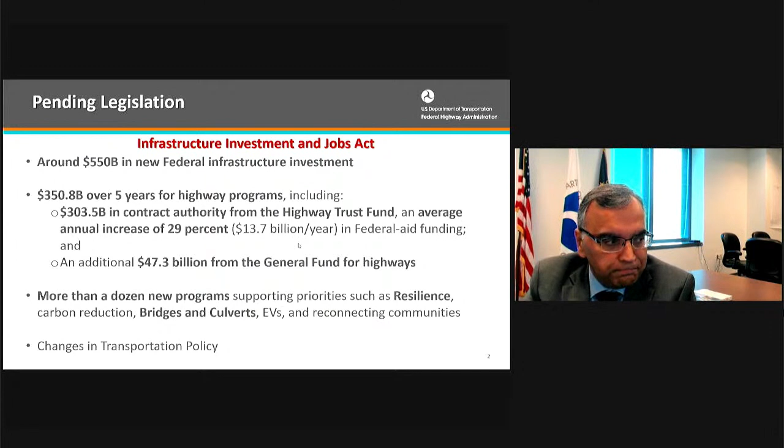Now, to Scour. Let's talk about Scour a little bit, but let me start with the history of the Scour program. Believe it or not, the consideration of Scour, along with associated attempts to apply science and engineering into bridge design, has existed for about 150 years. Obviously, the knowledge and understanding of Scour is now significantly more than at that time.

One of the important figures in Scour investigation, Dr. Everett Richardson, wrote an excellent paper on the history of Scour research and programmatic effort. Dr. Richardson noted that bridge Scour research prior to 1949 was not systematic, and much of it was single-purpose research or reports of Scour problems experienced at particular bridges. 1949 represents the beginning of the effort of Dr. Emmett Laursen from the Iowa Institute of Hydraulics Research. He began such systematic research within the United States. That's also about the same time when the US Bureau of Public Roads, the precursor of Federal Highways, started funding and supporting Scour research.

Furthermore, in 1962, the failure of the I-29 bridge over the Big Sioux River in South Dakota taught us two things. One is that Scour could adversely affect even new major structures. Second, discharge alone is not a predictor of how Scour forms at these highway structures.

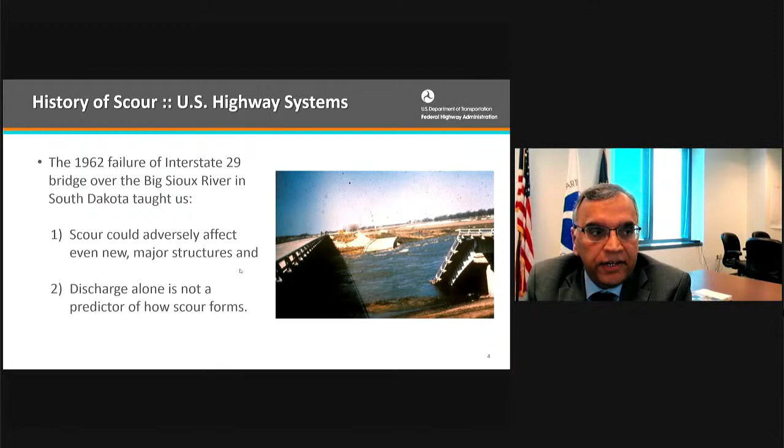Next, we move to 1973. The Federal Highway published a report in 1973 to define bridge failure and later provide data on bridge failure from the hydraulics-related component. Clearly, Federal Highway and the transportation community recognized the need for Scour research. However, various factors played a major role in not consistently applying research insight to the bridges. The key factor, simply put, is that Federal Highway lacked authority to consider Scour at bridges in anything more than a research context.

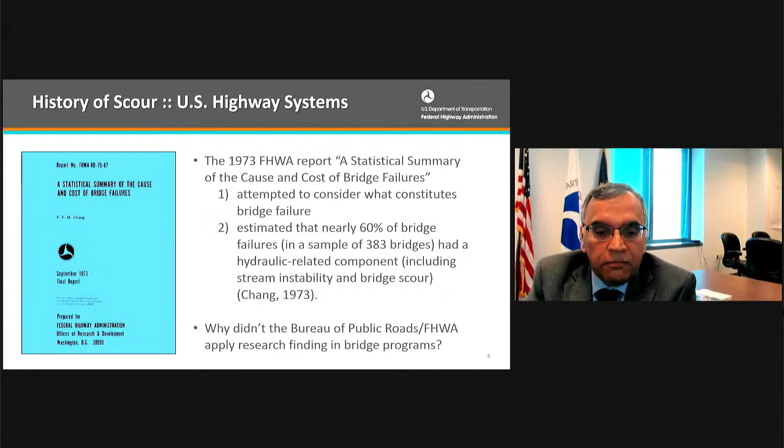Furthermore, in 1968, we started to get our statutory framework with the passage of the Federal Aid Highway Act, signed by President Johnson. That led to 1971, when we promulgated a regulatory requirement within our 23 Code of Federal Regulation to add national bridge inspection standards. However, NBIS at that time did not include or consider Scour.

And actually, on April 5th, 1987, the Scour-induced collapse of the New York I-90 bridge resulted in 10 fatalities and disrupted a major interstate route. That incident was a major impetus for establishing the Federal Highways Scour program. During the NTSB's investigation, they summarized in their report that contributing to the accident was inadequate oversight by the Federal Highway Administration. Subsequently, Scour-related bridge failures reinforced the need for Federal Highways oversight of Scour.

Based on that particular bridge failure, Federal Highway initiated a response directing that each state should evaluate the risk of its bridges being subject to similar damage during a flood in order of 100 to 500 year return period or more.

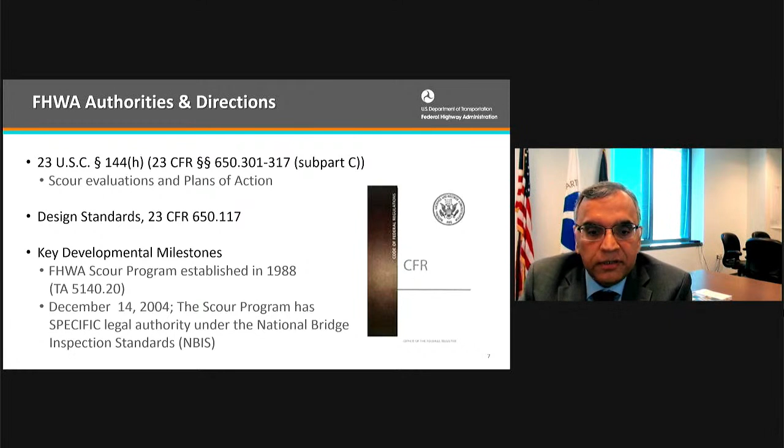So let me take a few minutes to talk about where we're going. Recognizing opportunities to improve the Federal Highway Scour program, the agency has adopted a common vision and implementation of a forward-thinking next generation Scour program called Next Scour.

The Next Scour program is an initiative with the goal to improve the design and analysis of scour that affects bridges, culverts, and embankments, with the primary goal of this initiative, obviously, being bridge scour.

Within the Next Scour initiative, Federal Highway seeks to strike a balance of continuing support of our current Scour publications, while also recognizing the need to advance the state of practice for Scour analysis through research to determine the worst case Scour depth.

So who is our target audience? The design engineers of all disciplines, whether they are generalists, hydraulics, geotech, structures, or operations. So obviously all the design engineers, construction workers, the operation and maintenance staff all have an interest in a safe bridge program. While the program is applicable to the larger group of engineers, the focus will be providing support specifically to hydraulics, geotech, and structural engineers in charge of Scour analysis.

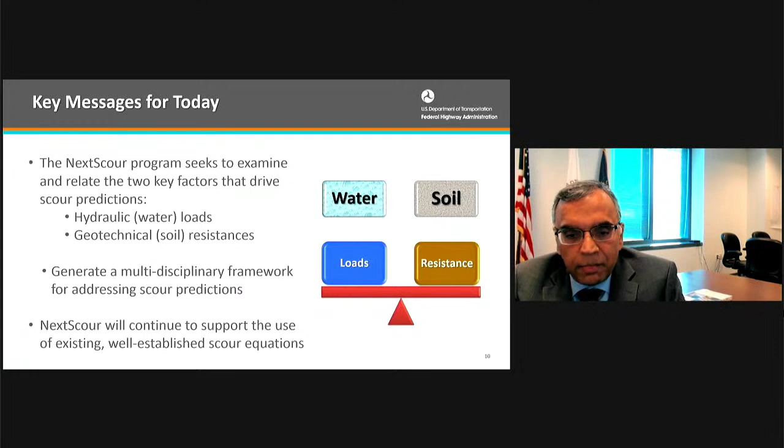Next we will seek the input of hydraulics, geotech, and structural community, both from practitioners and the academic community, federal agencies, and others for the development of program improvements. We intend to ensure transparency of development, but also ensure the final products meet the programmatic requirements.

As well as providing functional products, Federal Highway expects the appropriate application of Next Scour program concepts and tools will result in cost-effective and safe bridge design or water crossings, through improved usage of existing tools and the development of improved accuracy tools that will continue to ensure safe bridges on our highways.

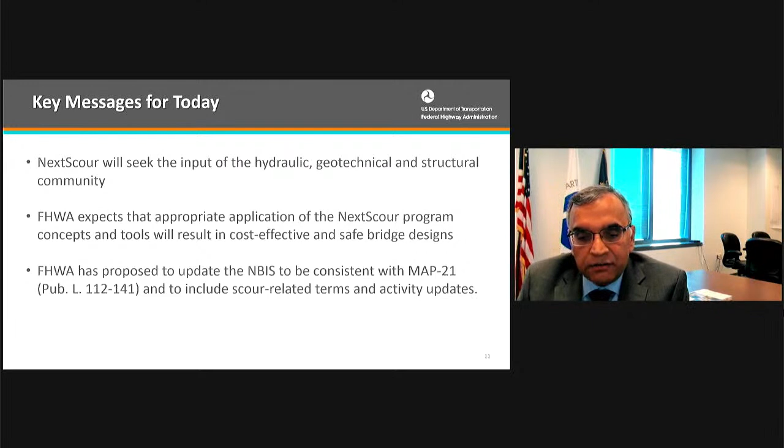Federal Highway has proposed to update the NBIS to be consistent with the MAP 21 requirements and to update the scour-related terms and activity updates.

Now, you all know that I don't have to tell you that water and hydraulics is among the most common reasons for damage and failure of highway bridges in the United States. Within these water-related occurrences, scour continues to be a significant contributor to bridge failure.

Federal Highway has provided owners with a series of scour-related publications to assist in the design of bridges that, if properly designed and constructed, would not be vulnerable to scour.

Using actionable and applicable results of scour-related research and common practices, Federal Highway aims to routinely update these manuals to provide owners with recommendations to address stream instability and potential scour.

In coordination with the NHI, National Highway Institute, we are currently updating HEC 18, 20, and 23 and their associated training courses based on the advancements we have learned since their last update. Virtual delivery platforms are now available for many NHI hydraulic courses.

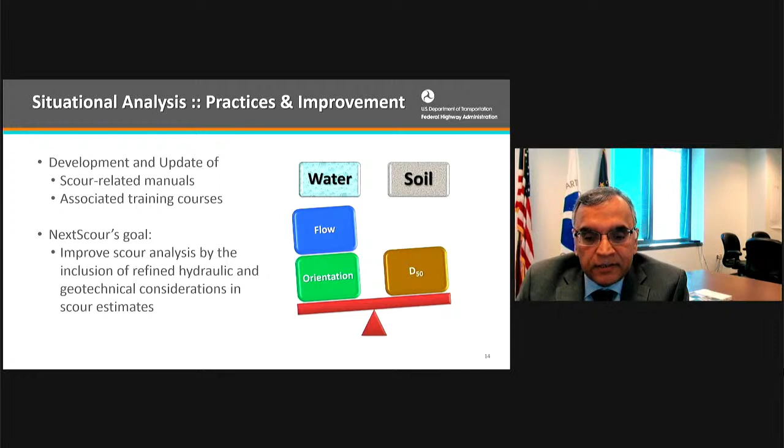I won't read both of these bullets, but you can see there are many facets being considered in the hydraulic loading aspect, as well as the soil resistance side of the equation.

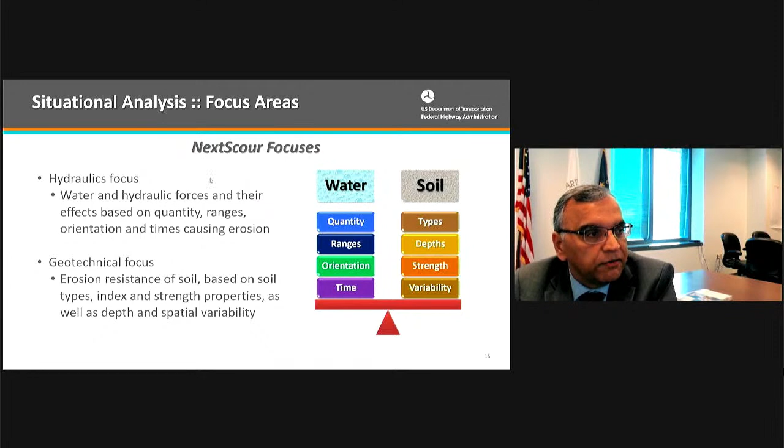I want to discuss some potential improvements of scour analysis. The Federal Highway NextScour vision is to continually improve the Scour program for each facet of the program, from hydrology to hydraulics to scour prediction.

As an example, the current state of practice for hydrology is where hydraulics engineers use the peak flow, or the rate of flow versus time, in designing hydraulic structures. Typical hydraulic practice estimates the peak discharge or hydrograph from historic stream gauge flow data, or for ungauged streams, deterministic methods.

There are other methods available. However, Next Scour recognizes the worst case scour in cohesive soils may not fully develop during one peak flow event, but rather is a result of multiple flow events.

To illustrate, perhaps we should be looking at how to represent a series of flow events over some service life that creates the maximum theoretical scour prediction.

How could we do so where no gauging station information readily exists? Are there means to describe some flow duration threshold so that hydraulic models can more readily consider the forces and effects of such situations on the stream, bridges, or embankment?

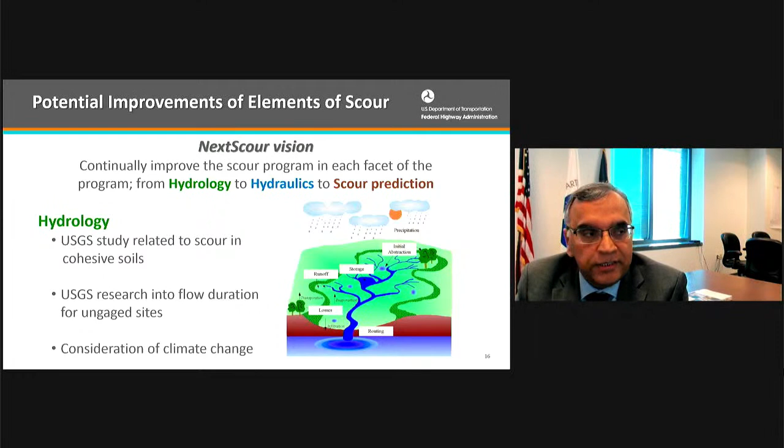Federal Highway is seeing an increased interest by owners to improve their hydraulic modeling by using 2D models instead of 1D models. This is an advancement in modeling due to a better representation of hydraulic site conditions.

Many bridge owners and their engineers are applying improved survey data found in LiDAR data, which further improves the scour analysis parameters that are provided by these more advanced models.

In addition to potential improvements to the hydrologic and hydraulic analysis parameters, Federal Highway continues to advance the state of practice for scour depth analysis by researching the geotechnical contributions the soil provides by resisting scour effect of water loads. Within the Federal Highway Research Program, there are currently 3 promising research initiatives: first, scour decay function; second, 3D scour modeling; and third, reliability-based scour design concept.

Let me very briefly touch on all those 3 initiatives. For the first initiative, the scour decay function: the current 5th edition of HEC-18 provides a discussion on rock scour for bridge piers using the stream power decay method. Federal Highway is developing a similar concept for scour in cohesive soils. The new idea will include water load decay functions for contraction, abutment, and pier scour.

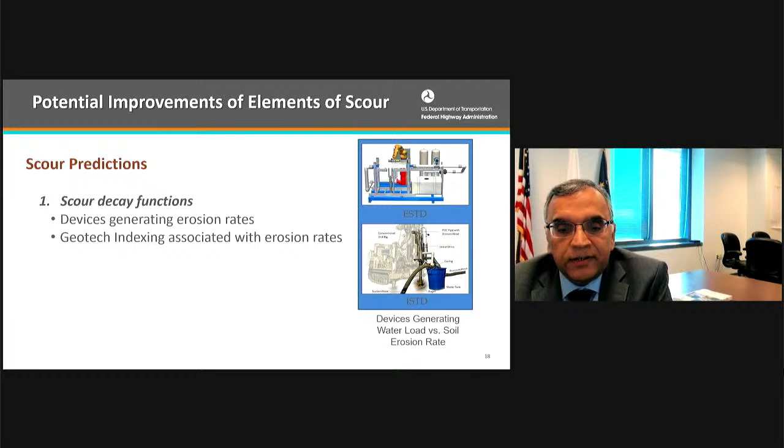We are considering this an attempt to associate erosion rates to commonly obtained geotech data at most projects and possibly avoid the need to perform costly erosion rate testing of each project.

Second research initiative is about the 3D scour modeling. We see potential improvement in determining each component of total scour using 3D scour models. Whether the development is performed through the Federal Highway Research Lab or its contractor or through another entity, there are many hurdles to overcome with this approach, and it will take much coordination by members of the hydraulic and geotech communities.

Some general steps for this research initiative include: build bridge hydraulic related software and applications capable of modeling sediment transport; model simple and complex bridge components; build a GUI to enter data for these conditions. Fourth step is develop the geotech stratigraphy and their erosion rates within the software environment. And the fifth and final step is perform many additional soil erosion tests to build a database of varying soil parameters.

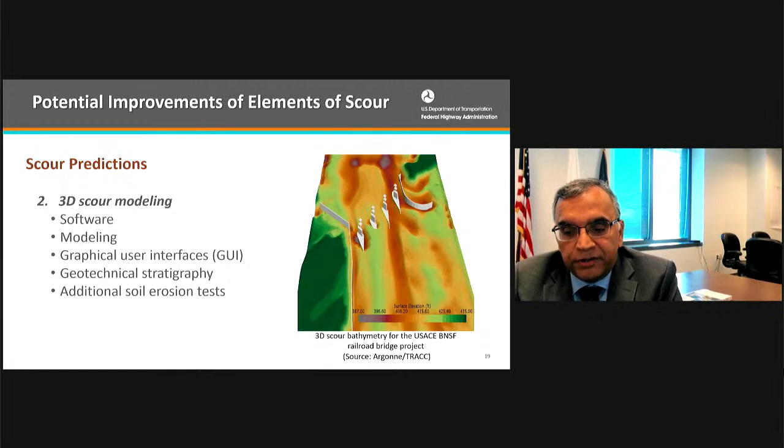Now for the third research initiative, the reliability-based scour design concept. The purpose is to identify and evaluate the uncertainty associated with bridge scour prediction, including hydraulics and model equation uncertainties. Reliability-based scour design concepts are being researched. This reliability-based design concept provides a powerful tool in quantifying the safety level of bridges and producing strong support for decision-making in bridge construction and maintenance.

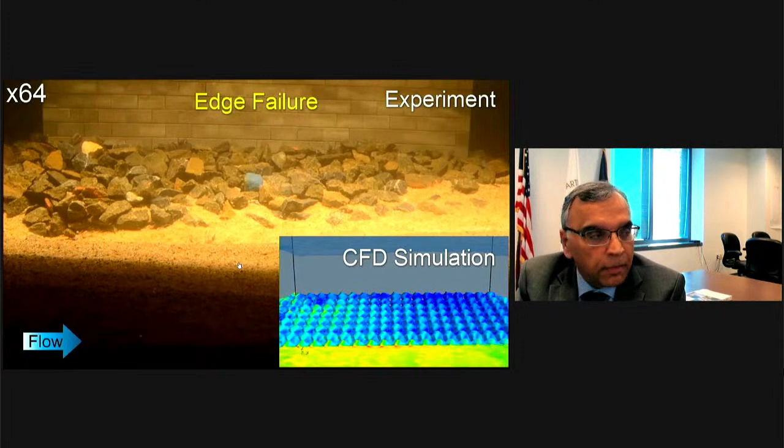Another research initiative underway is to determine riprap countermeasures reliability. Shear failure and edge failure are two modes of failure for existing installations that Federal Highway is evaluating. There's supposed to be a video on the screen, but unfortunately the video is not working, but that depicts our research on the edge failure.

The next scour program seeks to fill these gaps in the current scour program by performing collaborative research to integrate geotech and hydraulic engineering and provide improved and engaging training that will help engineers effectively use the existing and future scour tools.

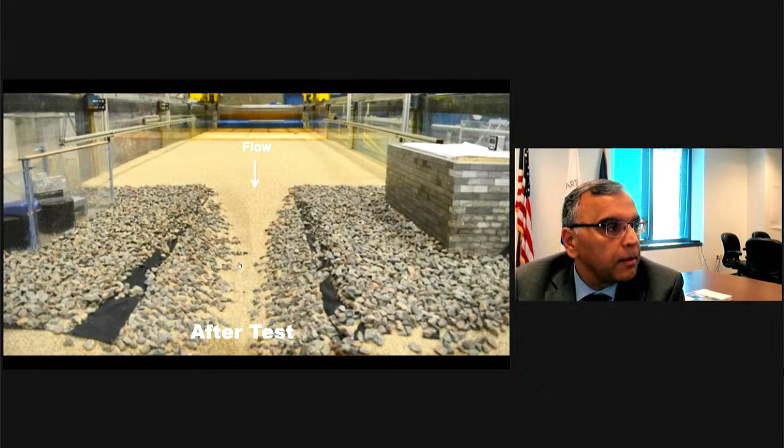Now, what you see on your screen are some pictures of our state-of-art Turner Fairbank Highway Research Center hydraulic research lab, where much of the research I talked about today is being conducted. Please be sure to take a virtual tour of our hydraulics lab at the end of this conference.

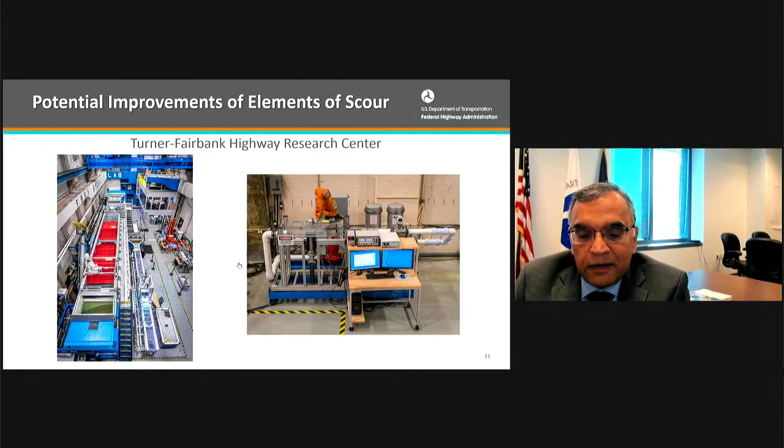Next, I just want to touch very quickly on a few scour design initiatives that provide for resiliency in bridges. Resiliency is a topic that Federal Highway is fully engaged in as we collaborate with state and local partners to address the demand of climate change. Designing resilience into our infrastructure directly relates to our next scour research.

I mentioned the research being conducted by USGS to take a probabilistic approach to predict future hydrologic conditions into the scour design process, as we anticipate and prepare for worst case scour conditions during the service life of a bridge so that it can withstand the worst case scenario. The use of 2D modeling will give more representative flow conditions that produce the worst case scenario.

And we believe that the 3D scour modeling has the potential to predict the worst case scour that needs to be considered in the final bridge foundation design, which will yield resiliency into our bridge design.

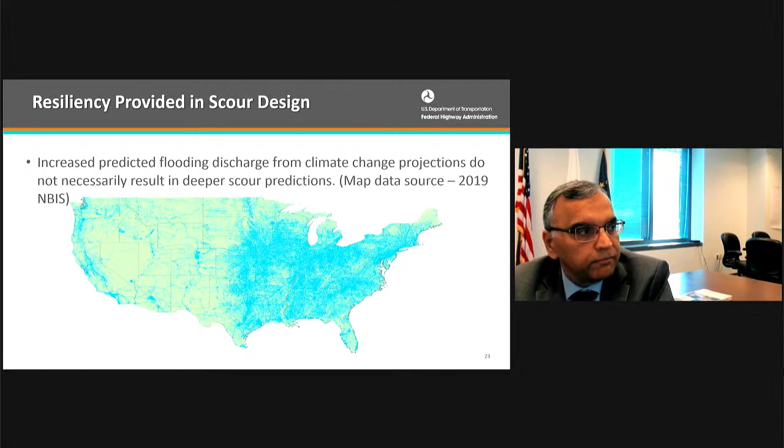Federal Highway recognizes that it is in our best interest to utilize the expertise within the DOT practitioner, AASHTO, other federal agencies, consultants, and academia to assist in our proof of concept as well as development of the tools that may be used in navigating the design process.

As I mentioned earlier, 19 state DOTs are currently participating in a proof testing of an in situ soil testing device to determine soil erosion rates for various soil types across the country. There are other practitioners who are also performing soil erosion rate studies, and their subject matter expertise will be valuable in enhancing this methodology.

For example, we recognize that Dr. Jean-Louis Briaud will be presenting after me, continuing to research soil erosion rates. Federal Highway also has plans to continue testing other devices in our Turner-Fairbank lab to estimate soil erosion rates. Of course, you all are our stakeholders as well, and we definitely appreciate your efforts and your insight.

Well, it's a pleasure to talk about erosion testing, simulation, and applications. I first want to recognize my two co-authors, who are two outstanding PhD students at Texas A&M University, Anna Shidlovskaya and Mostafa Bahmani. You will see their work as I proceed.

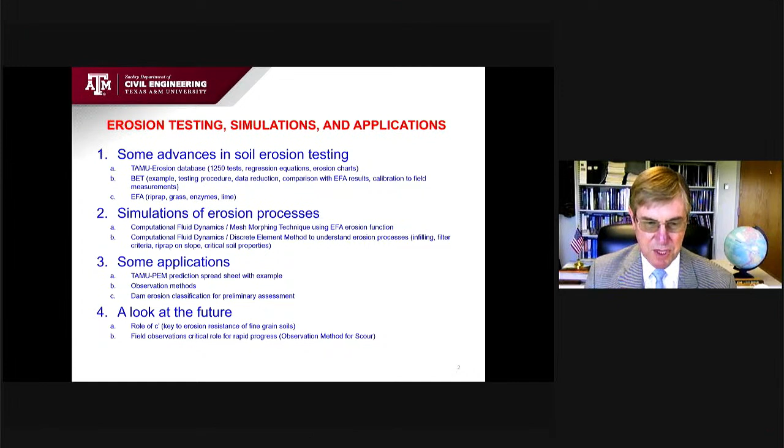So the presentation is divided into several points. The first part is on erosion testing. The second part is on numerical simulations. Then I'll talk about some applications and lead to conclusions.

The first thing I want to do about erosion testing is talk to you a bit about the Texas A&M University Erosion Database. It's an international database of 1,256 erosion test results. You see the blue list here: erosion function apparatus, jet erosion, hole erosion, slot erosion, 10 different types of tests that we organized. The data came from different countries, and the data is addressable. You can search this large spreadsheet. It has embedded erosion data along with all the references.

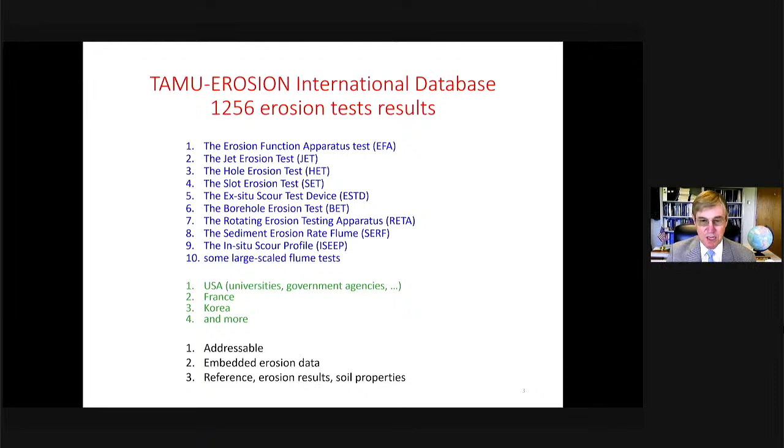So you see here, I mean, you cannot see anything on that screen, but I just wanted to show you, this is one page of that, and here we have about 6 tests. So each line is a test, and there are 1,256 lines like this. On the left side, you have the record information, then you have the erosion information. So for example, you might see here these plots. If you double click on those plots, they would come up and you would have the embedded spreadsheet of the actual data. And then the pink part right here is the soil properties, anywhere from common soil properties to advanced shear strength and deformation type of properties.

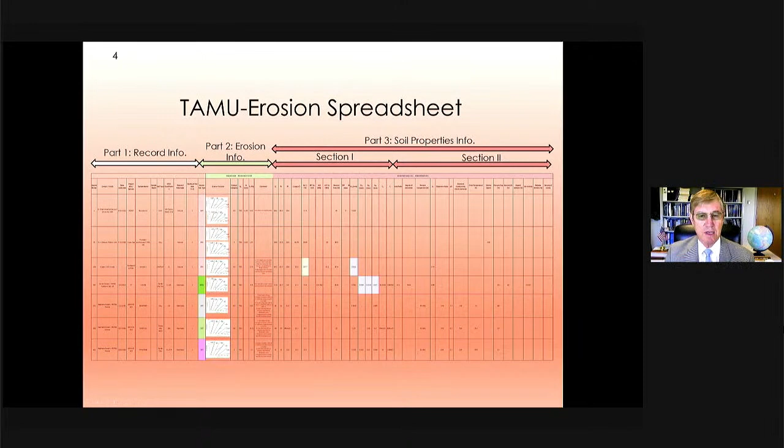So using this database, we organize, and I'm going to refer a lot to this plot here of erosion rate on the vertical axis and velocity or shear stress on the horizontal axis. Because we had so many tests, we decided to plot all the tests for different soil categories. So here on the top left, you see high plasticity clay. As you can see, the scatter is significant. And then here is high plasticity silt, here is silty sand. In each case, we were showing the domain where these tests were falling. So again, if you're here, you have a high erodibility material because the erosion rate is high when the velocity is low. And here you have very erosion resistant material, the erosion rate is low, even though the velocity is quite high.

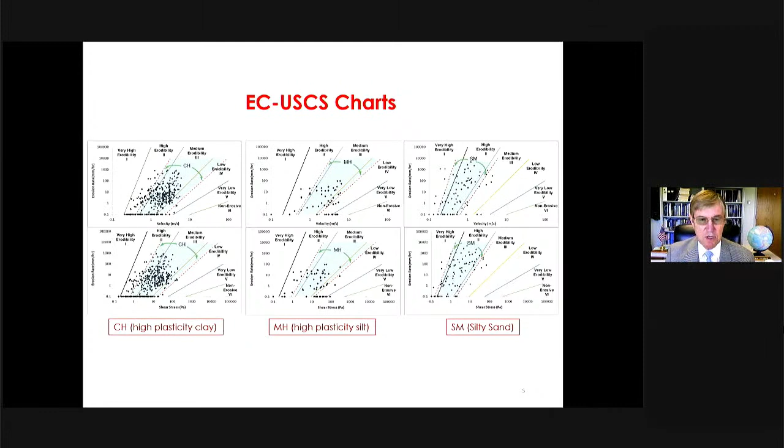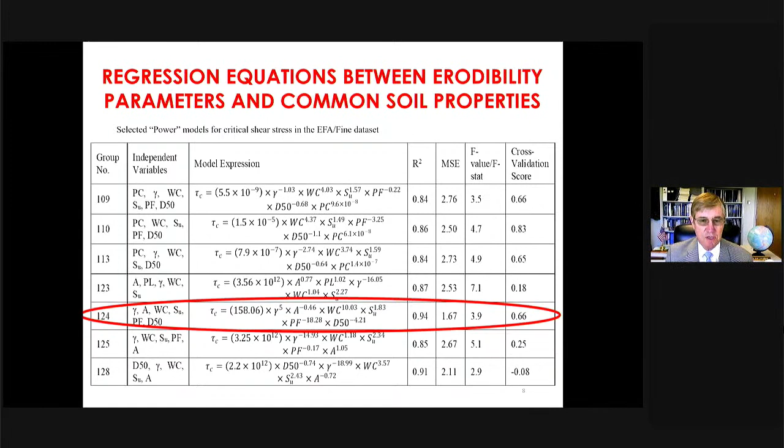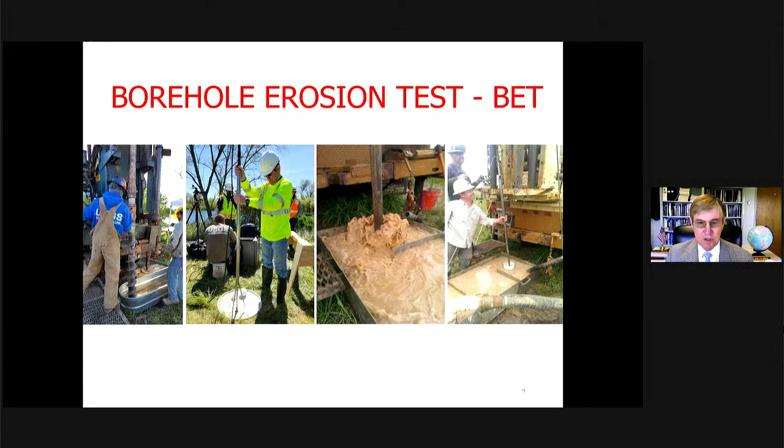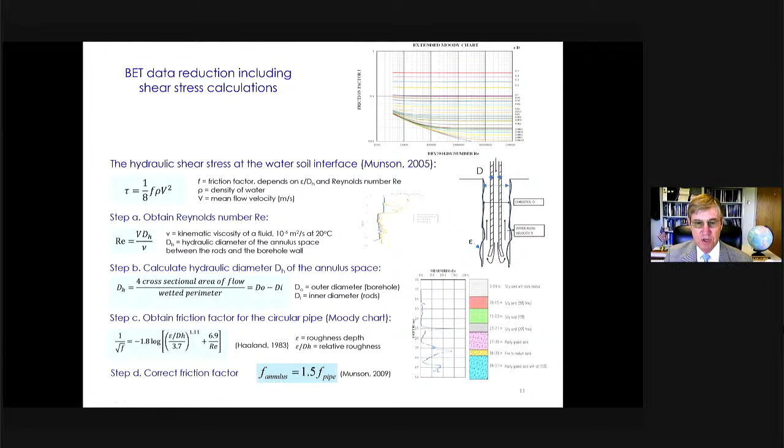So we have equations and we can go all the way to shear stress on the borehole wall. I'm not going to go through all that stuff, but I wanted to show you that in the process we had to expand the Moody chart to much rougher interfaces on the wall. In essence, this is what comes out of the borehole erosion test.

Some of you on the geotech side are very familiar with the cone penetrometer test, which gives us a very helpful and useful profile of soil strength as a function of depth. The borehole erosion test is to erosion what the cone penetrometer test is to soil strength profiling. On the left-hand side, we have radius versus depth.

We went down about 3 meters, 10 feet. This is the radius before, in blue, and the radius after the test, in orange. We can then get the velocity, and of course the velocity is not constant through the hole because the diameter of the hole varies. We're able to calculate it, so we associate this velocity to these measurements. We then can get the erosion rate by getting the change in radius divided by the time of flow. And then we can get the shear stress through the use of the Moody chart.

Here's two sites. At this site, you can see borehole diameter as a function of depth, in feet in this case, going down to 14 feet, about 4 meters. The first half of the borehole, the material is fairly erosion resistant. We have a weak layer here in terms of erodibility, and below that, an intermediate material. At the site on the right, some layers are very erosion prone towards the top, with a resisting layer, and below that, a fairly well erosion resistant layer.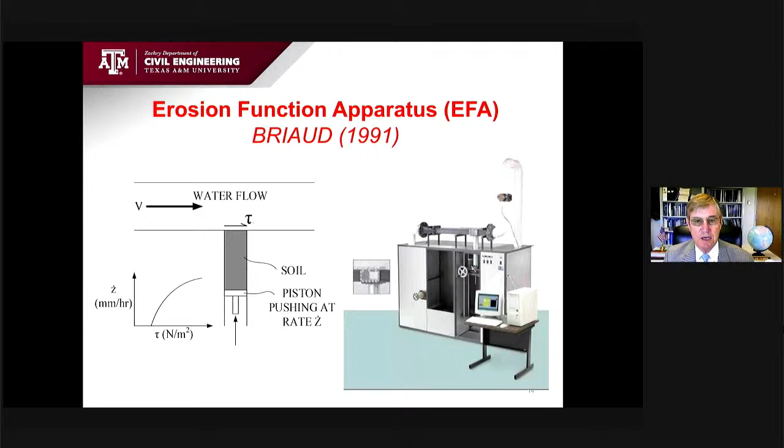And so from this, we can create a well-controlled and measured erosion function. So we had the tests from the site, near Sacramento on the American River. Thank you to Todd Rivas and the Corps of Engineers. We work with them at those sites with the help of USGS and USDA, a big team.

I don't have an answer for the difference. I have a few ideas, but I cannot prove any of them, so I'll refrain from making any comments on this, just to tell you to be careful. The profiling when it comes to the BET works well, but the erosion function is quite different from the EFA erosion function.

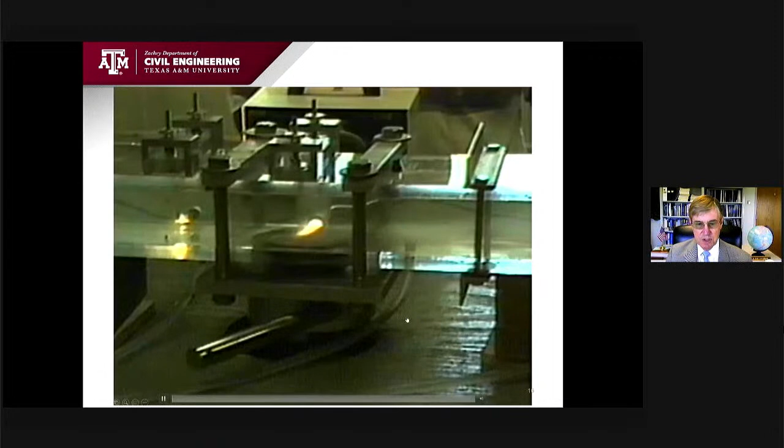So you've seen the EFA, and I want to show you now, you've seen this movie. I'll start the movie just to show you here, so that you know we're pushing the sand out of the steel tube. The water is flowing this way, and you can see the erosion, dramatic erosion of that sand layer.

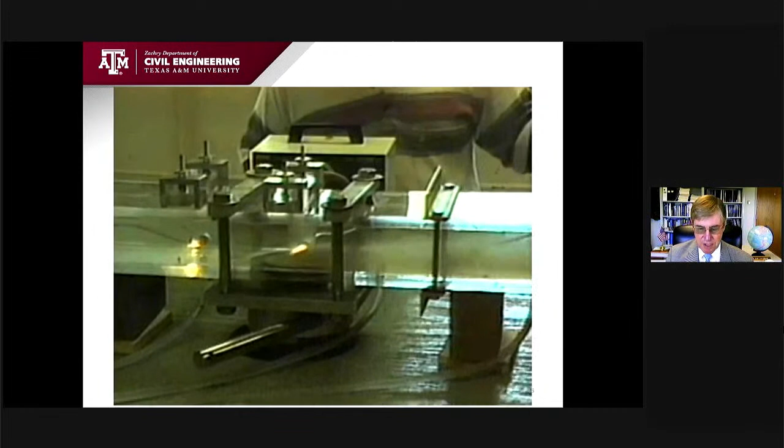We use that tool to test a number of things. We've been working quite a bit on erosion mitigation in the last couple of years, and here are some tests. Let me start this movie here. You're looking at riprap, simulated riprap. Of course, we're looking at a tube that is only about 7.5 centimeters in diameter, so you cannot put big riprap, but we put as big a gravel particle as we could. So there is obviously a scaling issue.

But what you saw in this movie is that we put the gravel/riprap right on top of fine sand, and in this case, you can see that the sand is being eroded through the riprap. On the right-hand side, we have riprap, and you can see the gray layer here - this is a geotextile filter that we put, and there's sand underneath it. In this case, you don't see any erosion of the sand because it's kept in place by the filter between the riprap and the sand.

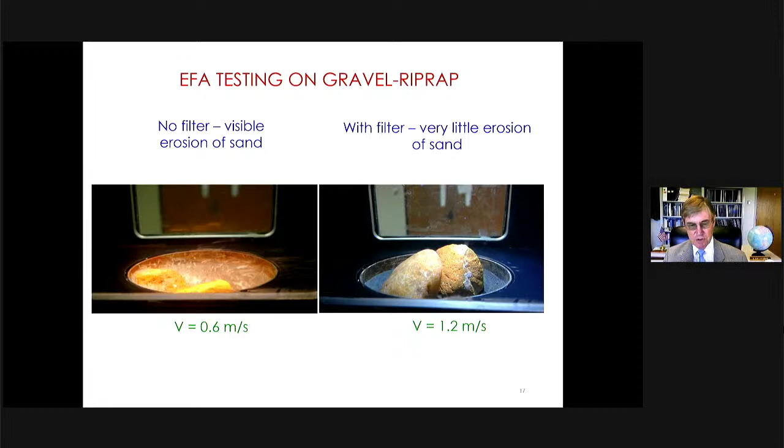So filters are necessary when you put riprap. This is the best way to make use of the riprap, and geotextile filters are the preferred solution. We did a survey on a project funded by TxDOT, and the solution - you can do granular filters, but the geotextile filters were favored in most cases. So that was for riprap.

But we tested grass, and all this, by the way, is the work of Anna Shidlovskaya - Dr. Shidlovskaya, I should say now, because she's graduating. She tested the Bermuda grass, St. Augustine, zoysia, and bahia grass, different types of grass, to see, again, in the EFA.

I'm going to show you, on the left-hand side, you're going to see Bermuda grass at 5.4 meters per second, so this is really going fast. And on the right-hand side, you're going to see zoysia grass at 3.8 meters per second. So on the left, it's going faster than on the right. You will see that the zoysia grass is going to erode completely and be detached, where the Bermuda grass - here's the test, and here's the test.

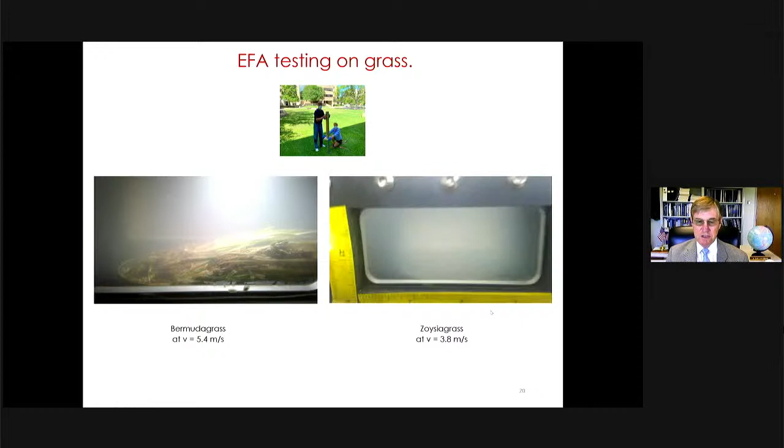You can see the Bermuda grass on the left-hand side is resisting very well, while the zoysia grass is starting to lift off. There's always a question of how valid a test is at 75 millimeter scale. Of course there are some issues, but if you want to do a levee overtopping test, you see on the right-hand side the grass is completely gone. The point is that the Bermuda grass turned out to be a 3-year-old grass, while the zoysia grass was only 1-year-old, so the extent of the root system was not as large. Different grass, different ages, different covers—there are many aspects of grass. Grass is a very natural product.

You're talking about a test that's about $1,500, compared to a levee overtopping test at full scale that's going to be a $50,000 test. So there's a combination of those two things.

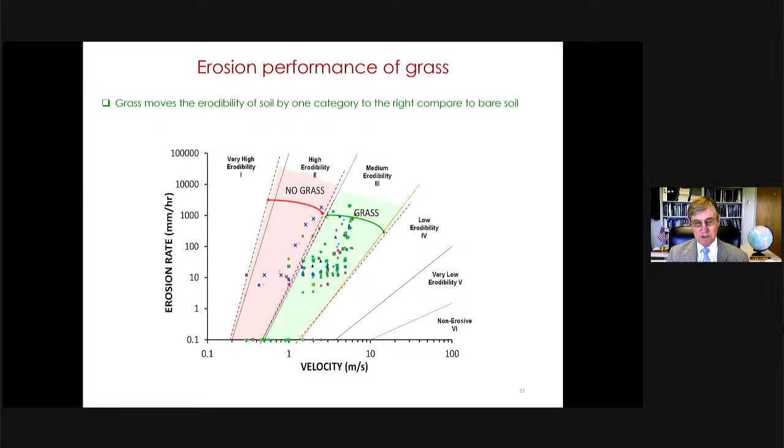So that was for grass. Looking at enzymes—enzymes are very environmentally friendly cells that we actually have in our liver, so they help us out. This is a picture of a termite colony mound in Brazil, and the termites are actually using enzymes in their saliva to glue the particles together and build something that's quite strong.

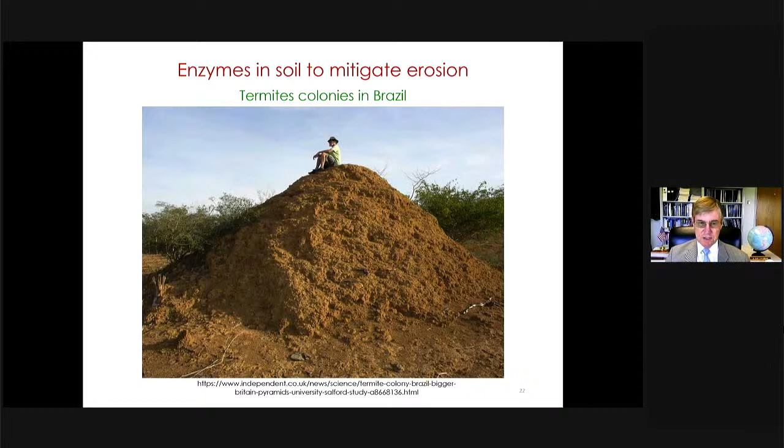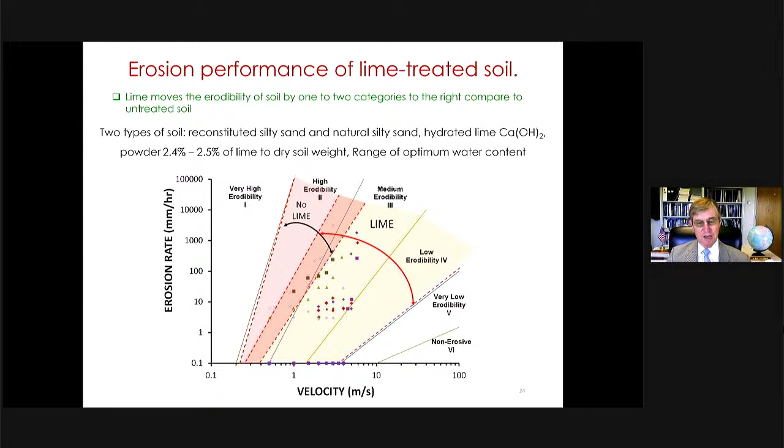Ahead of time, so that you don't go in the field and make the wrong decision. All right, so all this was tests in the lab and in the field. We talked about the database, the borehole erosion test, the EFA, and testing different soil admixtures and covers to be able to generate hopefully some environmentally friendly erosion resistant schemes.

The second part of the lecture has to do with computational fluid dynamics merged with either mesh morphing or the discrete element method. The first part was the work of Dr. Shidlowska. This part is the work of Dr. Bamani.

The way the CFD with mesh morphing technique works: you first have, as you see the steps on the left-hand side here, the CFD equations to obtain the hydraulic shear stress at the interface of this mesh. Then you use that shear stress and the erosion function to find the corresponding erosion rate. You then use the erosion rate over the time step to compute the erosion displacement, and you adjust the mesh shape to conform to the new eroded configuration. Then you repeat these steps as you step into time.

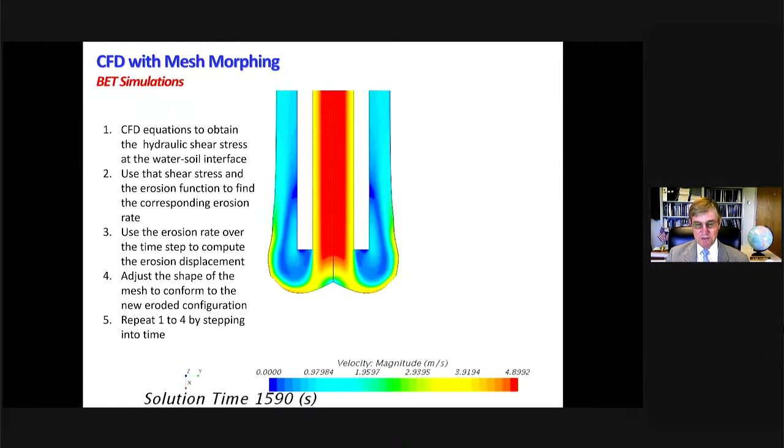So here is what happens during that test with the CFD mesh morphing technique. Let me play it again—whoops, maybe we'll do it over there.

So this is the same animation, but now I'm showing you the shear stress on the vertical wall, the shear stress distribution. You can see that towards the bottom, where the water turns the corner, the shear stress is quite high and erratic. But once the impact is about 1 diameter of the borehole, the shear stress becomes quite constant, and you can make use of those readings.

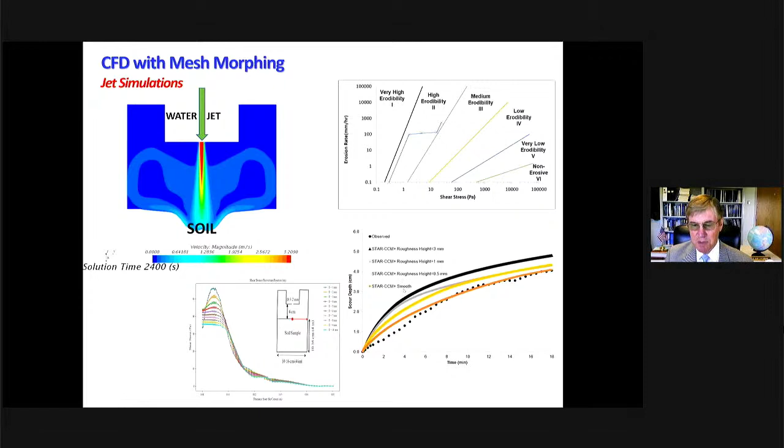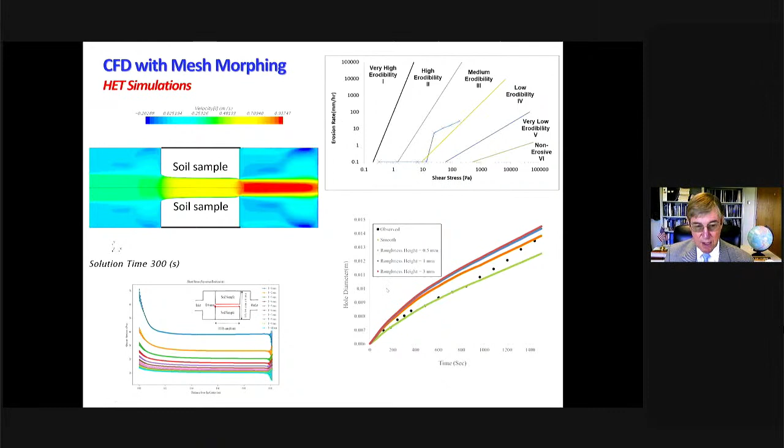All right, so that was CFD mesh morphing. The second technique I wanted to discuss, and I'm really excited about this one, is called the discrete element method. Many of you have seen it or used it, but there's so much potential with that method. It's remarkable, kind of a revolution in geotechnical engineering. So the method works this way.

You actually model the particles instead of a continuum. You set the number of particles to start with, and step one, you have the state of particles known at time zero. So you have the location, contact forces, displacement, velocity, acceleration - you're ready to go. And then you start and you move into time delta t.

The problem is that delta t is inversely proportional to the particle stiffness. A crystal, like a quartz grain, is very stiff. And because it's very stiff, delta t has to be extremely small. If delta t is not small enough, when you step into time, the particles move so much that you might find one particle in Japan, one in Russia, one in Argentina, and then the thing blows up. So you have to have very small time steps.

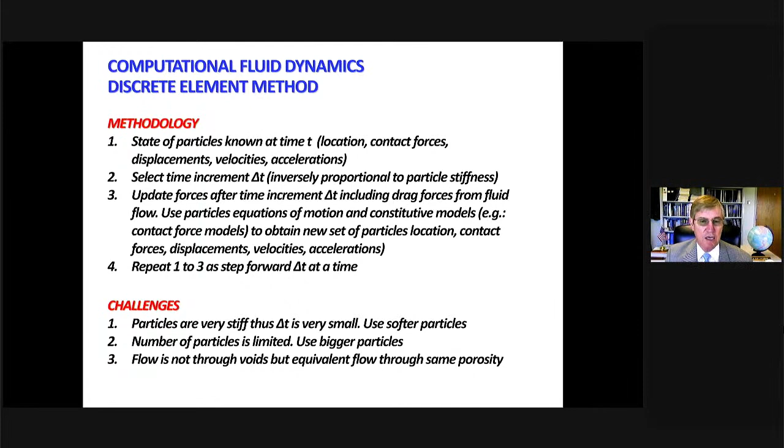All right, so you have equations, equations, equations, equations, equations. You get it. There's a lot of mathematics behind it, but that's not particularly fun. So let's see the results of this thing.

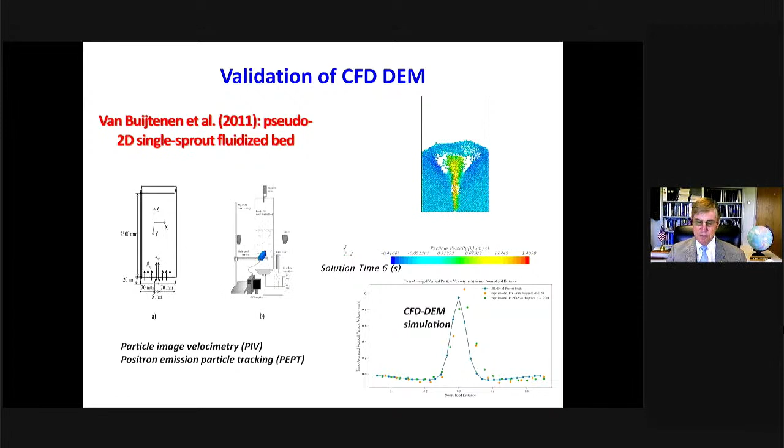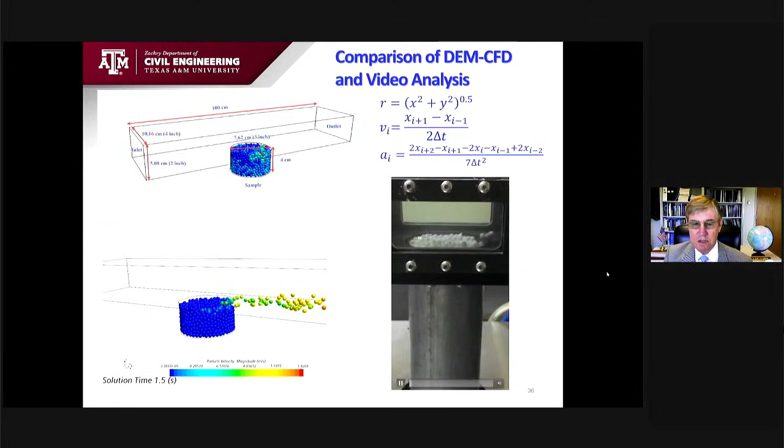So then we did things like this, where we modeled some Teflon balls for comparison. I'm going to move to some of the more interesting stuff.

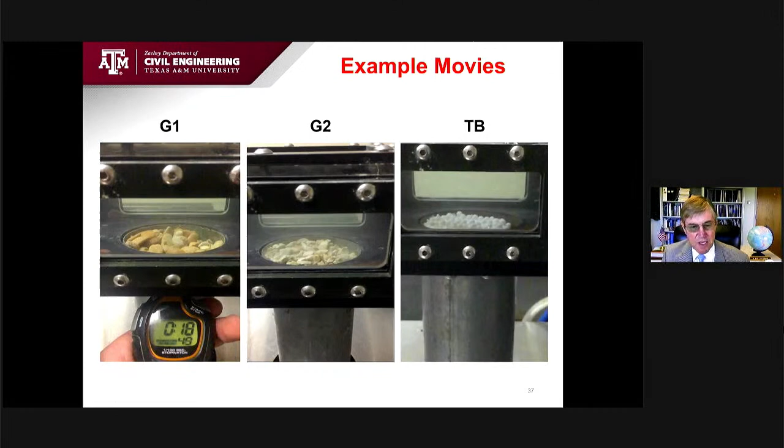We used a camera on the EFA, and we ran some tests here with different materials. On the left, you have a rounded gravel. On the center, you have an angular gravel, and on the right-hand side, you have some Teflon balls.

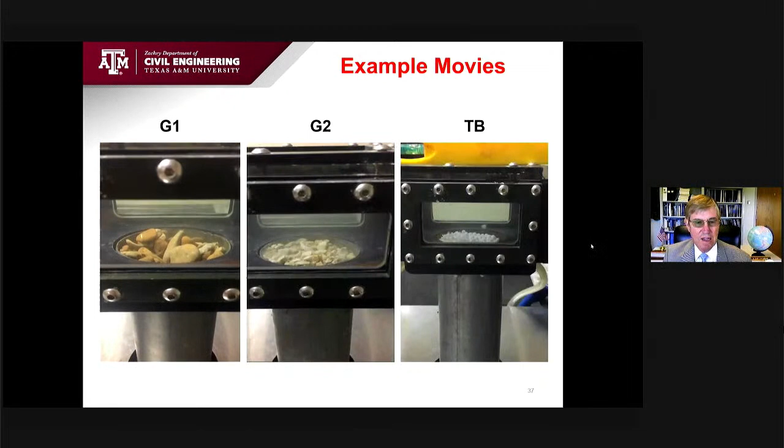And it's actually a really nice technique called image analysis with Tracker. Tracker is a software that's pretty inexpensive. And what you do is you track the particles. So this particle right here in the next frame is moving over there. In the next frame, it's actually detached and it's gone.

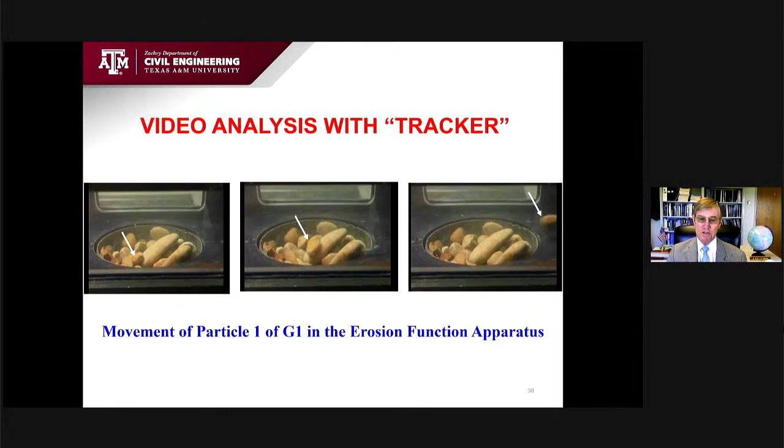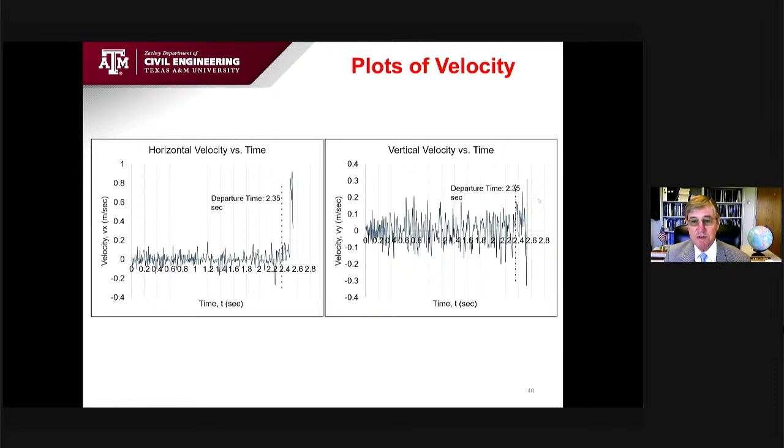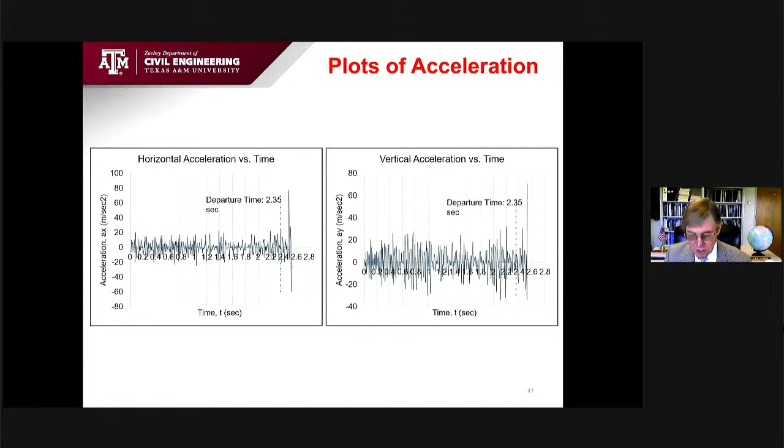You multiply by the mass of the particle and you get the drag force in the horizontal direction, and you get the normal force in the vertical direction. And the red line here is the weight of the particle. And you can see now the hydrodynamic forces that are exerted on that particle in the horizontal direction, drag force, and in the vertical direction. Note that the magnitude, which in this case is about 20 millinewton, is about the same in the horizontal direction as it is in the vertical direction.

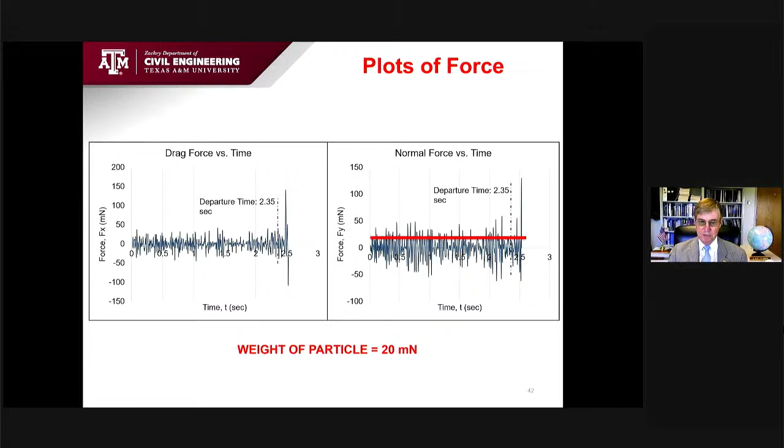And the weight of the particle, as I said, this is 20 millinewton. And here, the lift force becomes large enough that it's actually detaching the particle. So I think this image analysis is really a nice potential. For a long time, I've tried to think of how to measure shear stress.

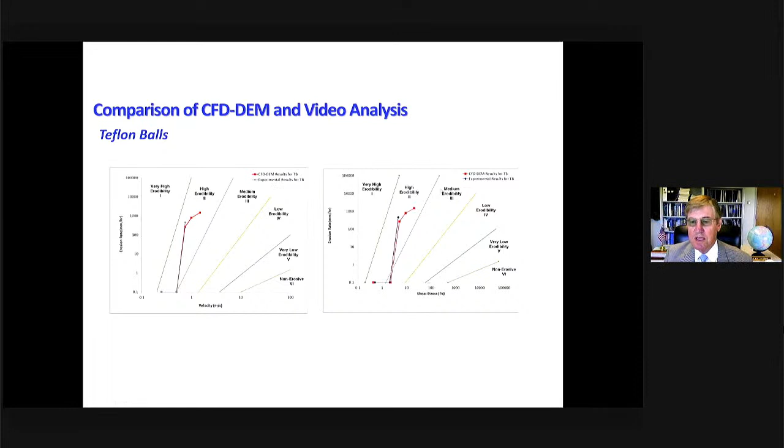use the CFD-DEM and try to model the results of the video analysis. And you can see here on the left side, again, we're back to erosion rate versus velocity. This is the red, the CFD-DEM results for the Teflon balls, and the blue is the experimental results for the Teflon balls. This is in terms of shear stress on the right-hand side.

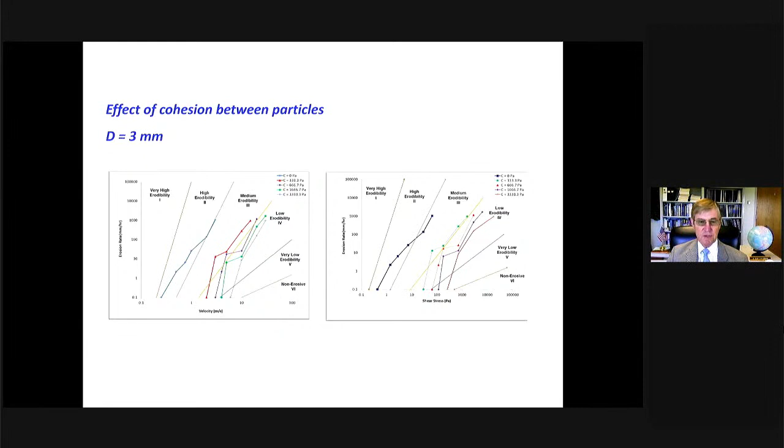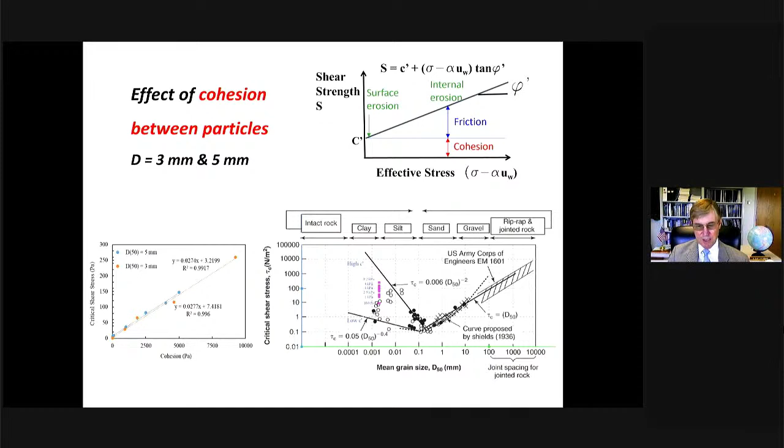Going back to what I showed you earlier—critical shear stress versus mean grain size—you can start making sense of the big scatter on the left side for fine-grained soils by putting in lines of cohesion, and we're starting to collect data in that direction. All right, let's move on to other applications.

CFD-DEM and infilling. Infilling is an issue in bridge scour, and it's frustrating because it takes place from time to time and we don't have a good way to measure it. Yet we typically make decisions based on the depth of infilled holes, not on the depth of the hole at the time of the big event.

So we simulated that process: the flow velocity decreases, deepening of the hole takes place during the storm, and infilling takes place as the water slows down. So we simulated the water slowing down to see how much infilling occurs.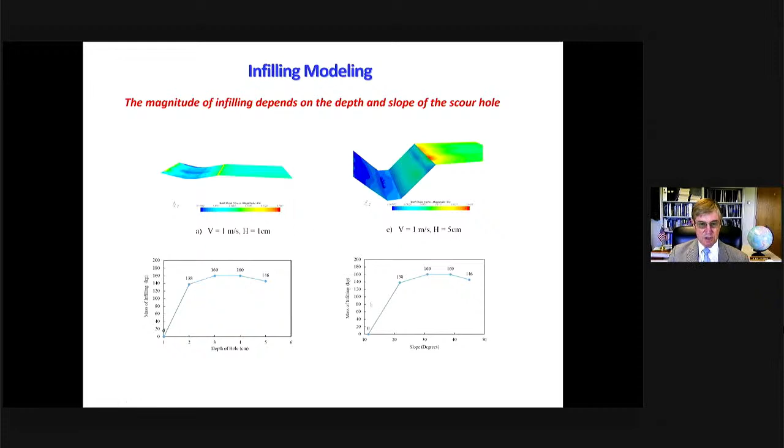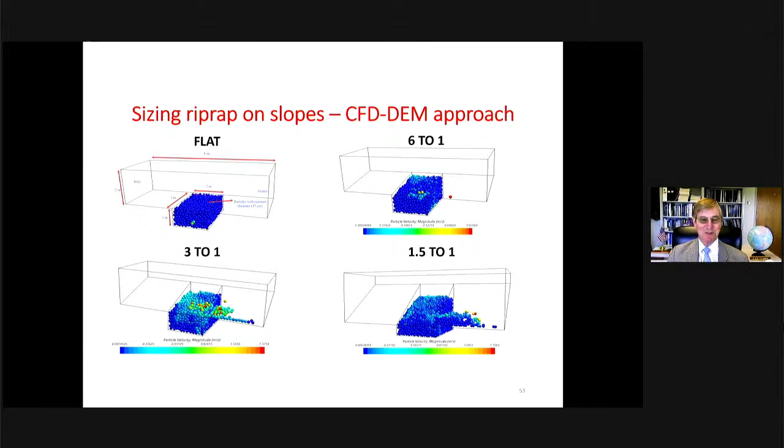There's a 6-to-1 slope, a 3-to-1 slope, and a 1.5-to-1 slope. With a 1.5-to-1 slope and water flowing this way, you get a lot of riprap movement. The critical velocity of riprap depends on the slope of the abutment—we're working on this as we speak. My colleague B. Hunt asked me that question about 15 years ago, so it took me a while to answer, but some of it is here: critical velocity on the vertical axis versus slope angle of the abutment slope—few results, not much data yet, but we're working on it.

Terzaghi filter—Jennifer, how much time do I have?

We're good to go for another 10 minutes or so. 10 minutes, okay, good.

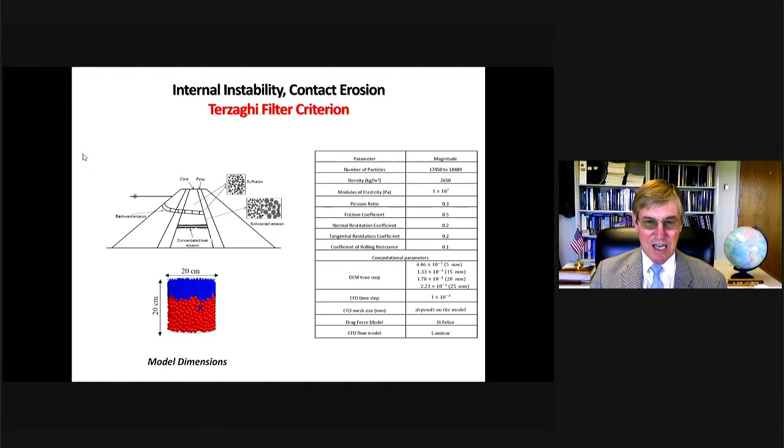Let's look now at filtration in dams. Again, because we're inside a dam, we're going to have to set a pressure pretty high to represent the true condition between the particles. We simplified the problem significantly.

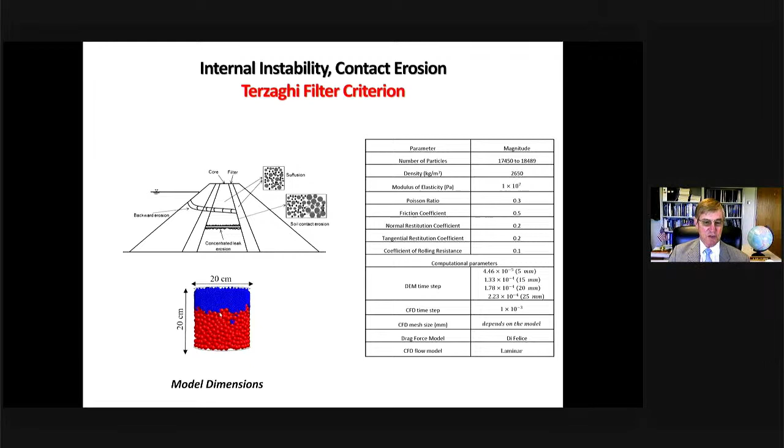We're going to simulate a downward flow with smaller particles on top of bigger particles to see if the smaller particles will actually travel through the larger particles as a function of time.

The Terzaghi filter criterion is well known in seepage analysis for dams. It says that when you have a contact problem, you have to be sure that you don't have too much of a gap in sizes between the native material and the filter or the riprap. We heard about filters before, and Terzaghi said 4 as a ratio between the two particles.

So we started with uniform particles here with a ratio of 4. The ones at the top are 5 millimeters, the ones at the bottom are 20 millimeters. Here's what happens: you can see that some of the particles go through the big ones on the way down as the flow comes down this way, but not too much.

Now let's look at 5 and 25, so it's pretty close - a 5-to-1 ratio versus the 4-to-1 ratio we had before. Here's what happens: in this case, a lot more of the blue particles actually penetrate through the red particles. So Terzaghi really had it right.

You can see here the normalized mass loss as a function of the gap ratio: 4 dense, 4 loose, and then 5 - and boom, you have a lot of migration through these two cases. This was for uniform material.

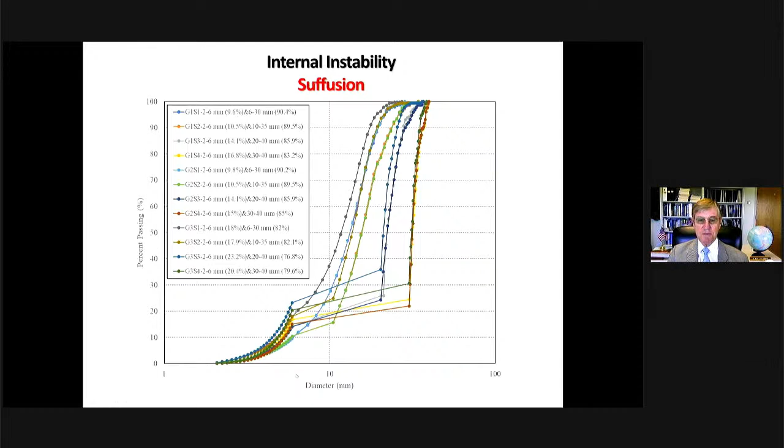All right, let's look at this. This is a well-graded case - we have small particles that are 2 to 6, and the big ones graduated from 6 to 30. Here is the simulation of the suffusion process. You don't see much migration in this case.

If you have a gap-graded material, here's what happens. So with CFD-DEM, if you have a dam with a certain material on one side and another material on the other side, you can do these sorts of simulations and see if you're really going to run into a suffusion problem or not.

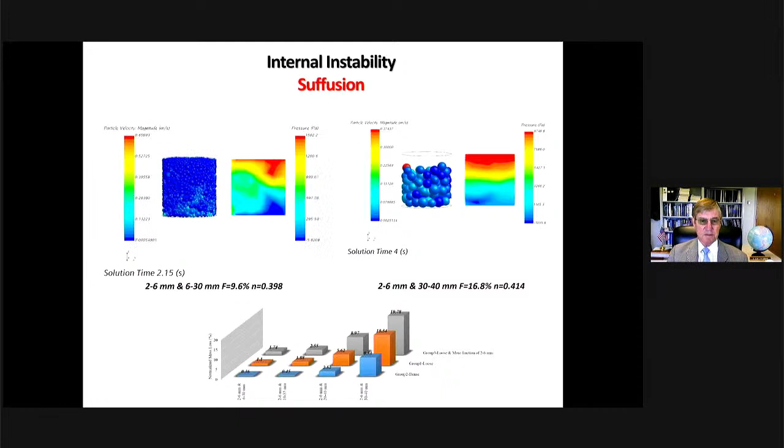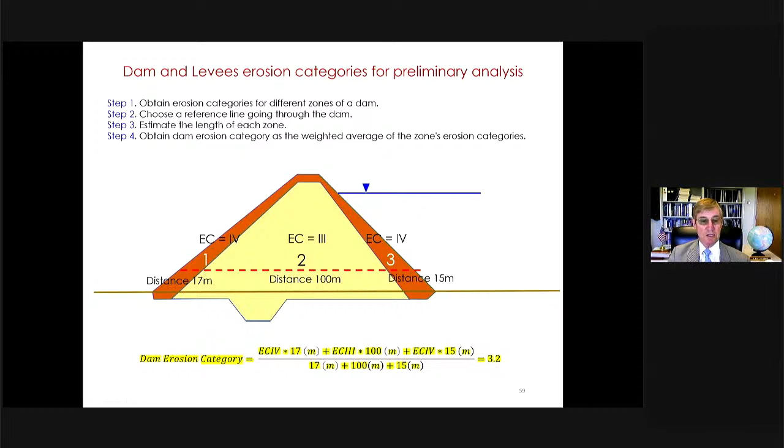So when you plot it on this curve of erosion rate versus shear stress - this is erosion category 1, this is category 2 with a line at 1.5, this is 2.5 - our dam was at 3.2, that thick blue line. We did that for the Teton Dam: went there, did some testing, and the Teton Dam failed by internal erosion. We got 2.6 through this technique. So there must be an erosion failure boundary for dams somewhere in here, and we're working on that.

Another simple spreadsheet is TAMU-PM, prediction of erosion movement. You use the erosion function and the velocity hydrograph for the case, and you predict the erosion movements. It's a very simple spreadsheet - you see the erosion function here, the velocity hydrograph, and then the erosion movement over here.

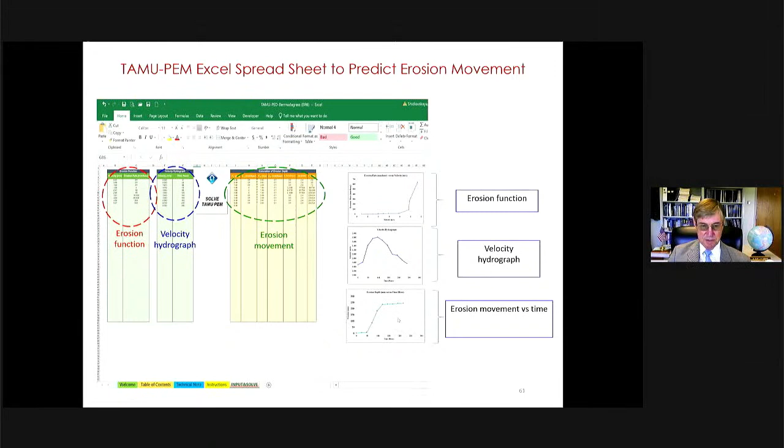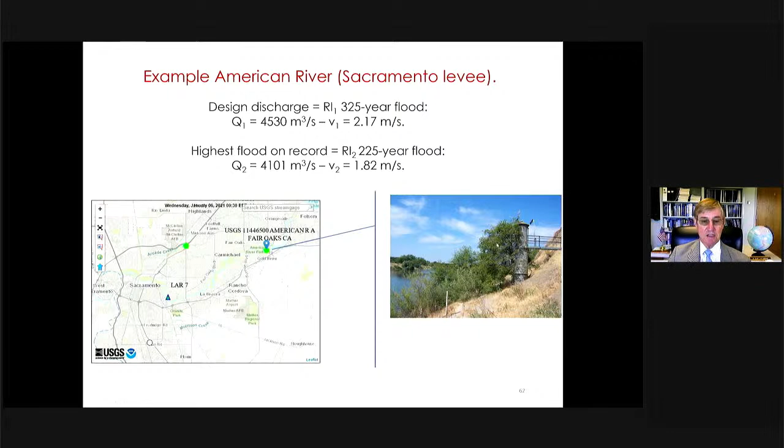So we're back to the American River, courtesy of Todd Rivas and his team at the Corps of Engineers. We're looking at a site on the American River on the left-hand side, and there is a gauge at that site, so we were able to get the actual hydrograph. There is a lateral migration of about 6 meters between 2007 and 2017, 10 years. We knew it was 6 meters, so we used PEM, and by trial and error, defined the erosion function necessary to match the observation.

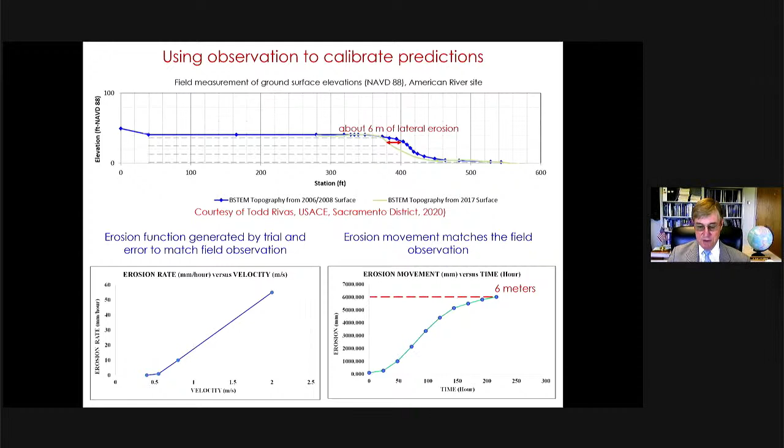And here's what we found. The generated curve, by matching the observations, is somewhere between the pure soil, which we tested in the EFA, and the grass test that we ran later on. So it seems to make sense in that case. And that gives a sense of the power of observation methods.

In the case of the scour depth I just showed you, the current practice is based on flume tests, which means we have a scaling problem. It's based on the wrong worst soil because it's fine sand, which is the easiest thing to use in flume tests. It's a simplified geometry with simplified single velocity, whereas the observation method is at full scale. You use past history observed at the bridge to predict what's going to happen if it sees a big flood. It uses the right soil, the exact geometry because it's the bridge itself, and the exact velocity hydrograph.

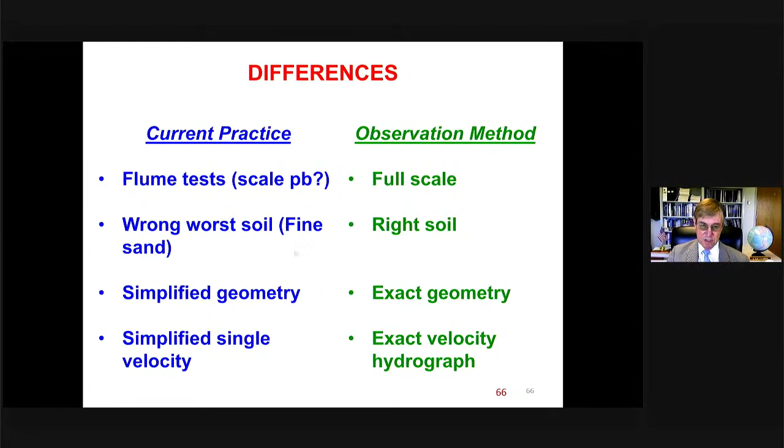So this is my last slide. I've shown you some advances in soil erosion testing. The BET is a very valuable field test for erosion profiling. Riprap needs filter; geotextile is best. Grass, enzymes, and lime decrease erosion potential when used in the right conditions, but it doesn't always work. The TAMU erosion database is valuable, but it shows that correlations are hopeless. Well, I'm being a little tough. Measuring is best. Erosion classifications help at the preliminary level.

In terms of numerical simulations, I showed you some computational fluid dynamics mesh morphing technique that shows the EFA erosion function can predict the results of the jet test, the hole erosion test, and to some extent the borehole erosion test. The computational fluid dynamic discrete element method is extremely valuable, and I think it's really the future direction. We'll make great strides if we continue to work in that direction. Understanding the erosion process, including infilling, filter criteria, critical soil properties, and more. Some applications: the prediction of erosion movement spreadsheet, observation methods, dam erosion classification.

When it comes to looking at the future, I think the role of C prime—I'm really excited about this—the role of C prime to me is the key to erosion resistance of fine-grained soil. It opens the door to explaining the process of erosion, at least for surface erosion.

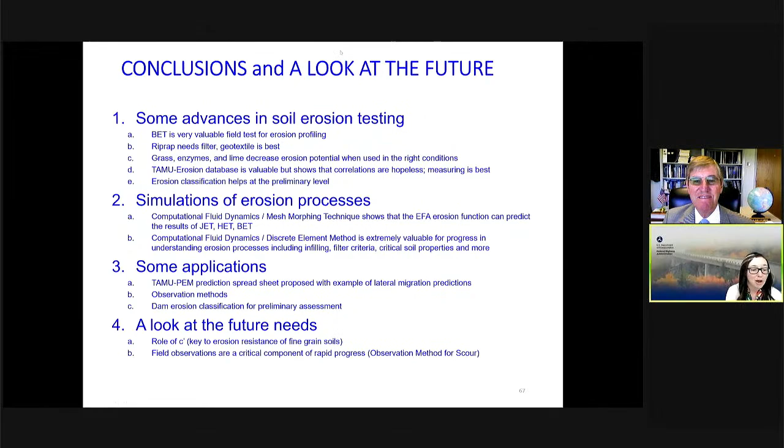It's really a clarification on how you measure the hydraulic head in your erosion test apparatus. They tried to do the same thing, followed your paper, but the numbers were crazy, and they saw very high fluctuations—especially sometimes the hydraulic head at the downstream is larger than the hydraulic head at the upstream. So can you comment on that?

Yeah, we measure the velocity through a flow meter, and so we essentially get flow as a function of time. There is some fluctuation, and we take the average flow value. There's a lot of progress that needs to be made in all those tests and techniques.

I can tell you what we do, but I'm sure there is room for improvement in all of this. We just measure it through a flow meter.

A similar type of question - when you mentioned velocity in your paper, you talk about average velocity, but the actual velocity changes with depth. So when they use the rectangular cross-sectional area, how do they calculate the shear stress from velocity, especially given that the Moody formula is good for circular cross-section, whereas the EFA has that rectangular cross-section? Can you comment on that in terms of the velocity?